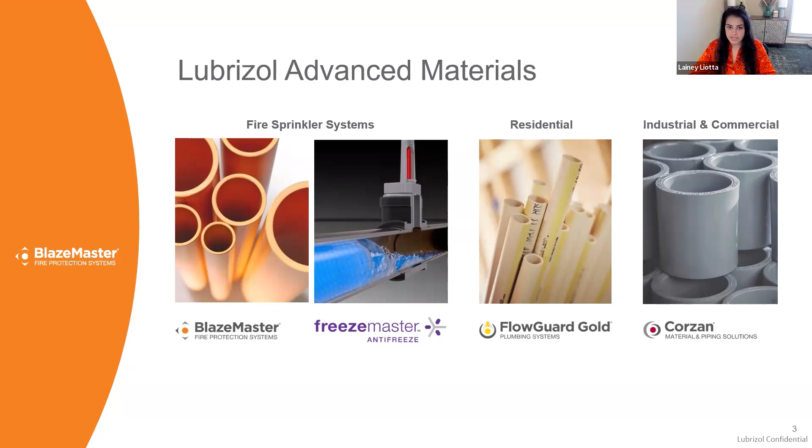But today, due to this being a fire protection webinar, we'll just focus on the BlazeMaster component. So Lubrizol manufactures the powder and the pellets that go into the pipe and fittings. We do not actually manufacture the finished goods. We are the science behind the finished good product, and we partner with world-class manufacturers to manufacture BlazeMaster pipe and fittings. And our two partners for North America that serve the world are IPEX and Viking.

Most of you are probably familiar with Johnson Controls or Tyco. They used to manufacture our product and sold off their CPVC business to IPEX. Fortunately, IPEX was already a customer of ours, both on the BlazeMaster side and on the Corzan side, so we already have a really good working relationship with them. I think it went into effect a year and a half ago, maybe a little less, and that was sort of a seamless transition from our standpoint. And they make just as good of a quality of product as JCI did. And then we've been partnered with Viking for a while too.

And then Georg Fischer, they make pipe only for aspirating smoke detection systems, or ASD systems, or what are commonly called VESDA systems. So when you're dealing with these three, you are dealing with BlazeMaster product. And so now I'm going to turn it over to Michelle and then Emily so that you guys can understand the science. And then I will come back on a little bit later and talk about how it applies to the job site. So Michelle, I will turn it over to you.

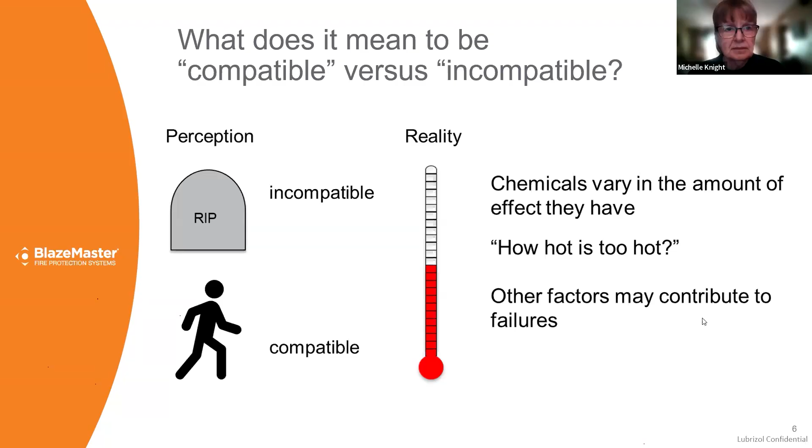Microbes living in the water or on the pipe wall can affect it. They will secrete acids as part of their metabolic process, and the acids will dissolve or corrode the pipe. Galvanic action, everybody's familiar with that. When you connect two dissimilar metals, you can have actual current that will corrode the piping system. And stray electric current, for instance, if someone grounds the electrical system to the piping system, that can cause corrosion of the piping system as well. So that's a summary of what metals might be sensitive to.

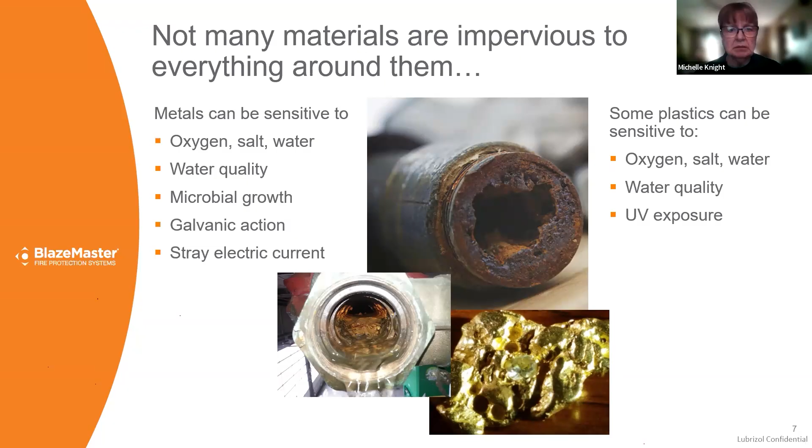It's not the same with plastics. Some plastics are sensitive to oxygen, salt, water quality, and UV exposure, but typically it's more organic chemicals that can be found in a variety of different kinds of products that you might come across on the construction site. CPVC is not sensitive to oxygen, not sensitive to salt, water quality, acids that might be secreted by microbes. It's got excellent resistance to all those kinds of things. But there are some chemicals that you'll find in certain construction products that might affect the plastic.

So what is CPVC? A little more background information here. CPVC stands for chlorinated polyvinyl chloride. So PVC, polyvinyl chloride, everybody is familiar with that. It's used in a million and one applications, both in the construction industry and other industries. There's vinyl siding, vinyl flooring, vinyl wall covering, all of that. Whenever you hear vinyl, that's all PVC.

CPVC is chlorinated polyvinyl chloride. So we start with PVC and we add additional chlorine to it. PVC is already 57% by weight chlorine. We increase that using UV and heat to catalyze the reaction. We add more chlorine to it, and that gives it higher temperature resistance, better flame and smoke resistance. So it makes it more suitable for hot water plumbing pipe and also fire sprinkler piping.

You can't use ordinary PVC for fire sprinkler piping. You need CPVC because it's more fire resistant due to the extra chlorine. And I just want to point out here, again, we're making CPVC using pretty high intensity UV light, and we're not degrading it during that process. So a little bit of UV from the sun is certainly not going to hurt the CPVC molecule.

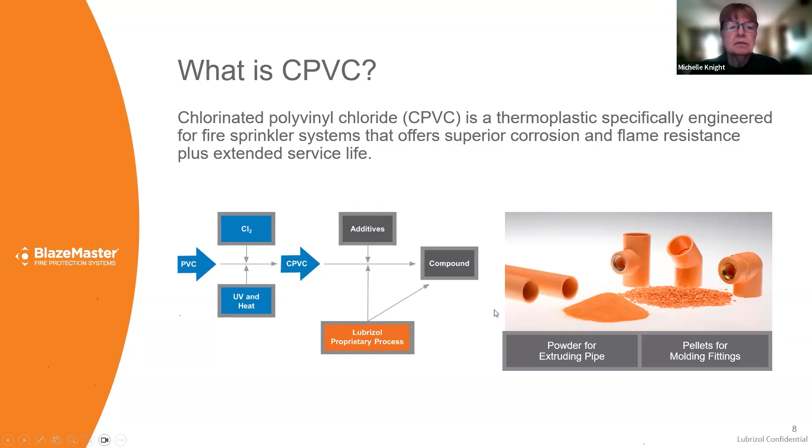The chlorine is a big, huge atom that actually physically protects the backbone from chemicals that might degrade or break down that plastic chain. They're so huge, they're literally like armor plating on the molecule. So this gives it excellent resistance to free radicals created by UV light.

Chlorine, it does not matter what the chlorine content of the water is, or if you need to shock chlorinate your system to kill microbes in it or something, you can't put enough chlorine in a fire sprinkler system to harm it. In fact, it's used in very high chlorine applications in the chlorine production industry in our Corzan products. And plumbing and Corzan are frequently installed outdoors, and they're not being degraded by the UV light there.

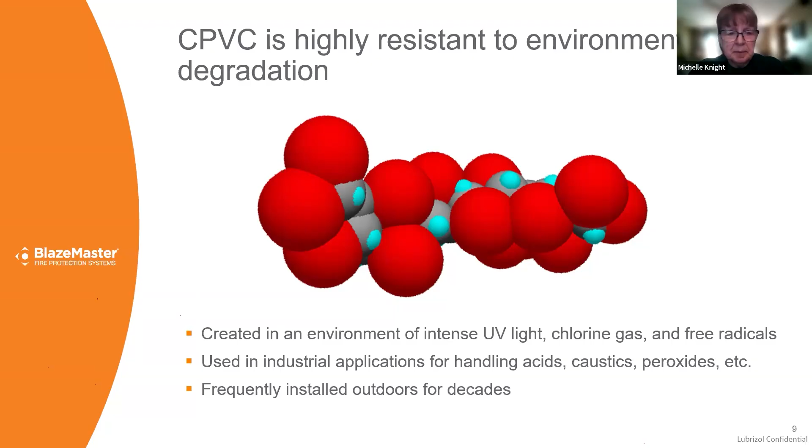So I've mentioned it already, but BlazeMaster is not incompatible with UV light. It does not affect the long-term pressure bearing capability. It does not decrease the service life of the CPVC. It may discolor it a little. The orange pigment doesn't hold up as well as the CPVC does. And it may age a little and become hard to cut.

We do recommend if it's been laying around in the sun, you use a gentler method of cutting than a ratchet cutter. You might want to use a fine-toothed saw or a wheel cutter. But if you can cut it without cracking it and get it installed, it's not going to affect its long-term pressure-bearing capability at all. Or if it needs to be installed exposed somewhere where it's getting a little bit of light through a skylight or a window, that's not going to affect it at all either.

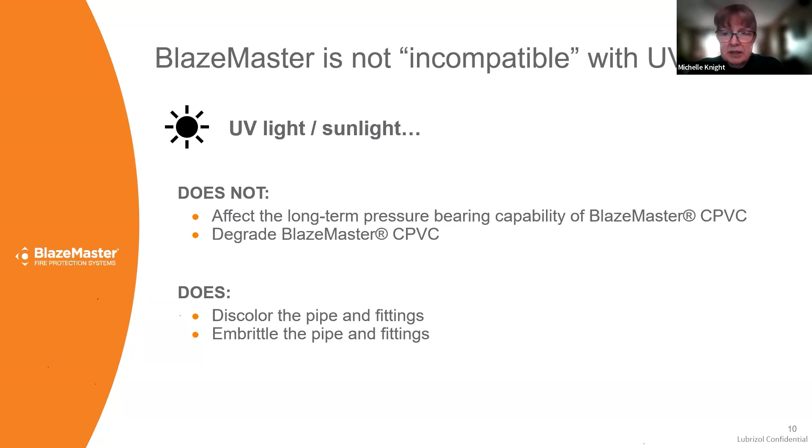So getting on to the subject of compatibility. There are three types of plastics, and CPVC falls into the first group, which is called amorphous plastics. Its strength depends entirely on chain entanglement. Other types of plastics like polyethylene or polypropylene are semi-crystalline. They're held together by those crystallites.

The molecules are all tied together. And this makes a difference in chemical resistance when the molecules are tied together or crystallized. Chemicals have somewhat less of an effect on them, so those types of plastics are a little bit less susceptible to environmental stress cracking than amorphous plastics like CPVC.

With CPVC, it's kind of a benefit that chemicals have an effect on it. It gives you the ability to do solvent cementing. You're probably aware you can't solvent cement polyethylene, polypropylene, fiberglass. Because chemicals can affect CPVC, we can solvent cement it, which makes for a nice, easy installation process. But it does mean that other types of chemicals as well can have an effect on the plastic.

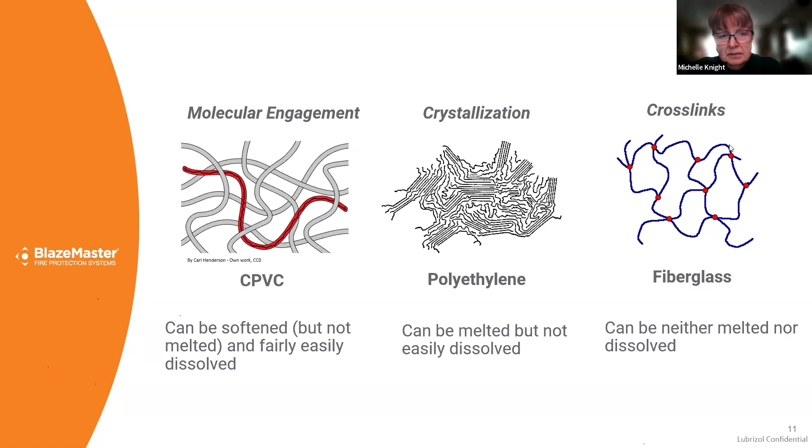So I like to use this analogy when I talk about the factors that affect environmental stress cracking failure, because everybody in this industry is super familiar with the fire triangle. You know that you need three different elements to initiate a fire and to keep it going. You need fuel, you need air, you need heat. It's also very similar with the performance of plastics.

It's not just the fact that the chemical is present that is going to cause the plastic to crack. In a lot of cases, these types of chemicals can be applied to CPVC and they'll last for years and years and years because you don't have the other contributing factors at a sufficient enough quantity. So typically you need some participation from mechanical stress on the system, and we'll talk a little bit about where mechanical stresses can come from in a sprinkler system. And then, of course, the properties of the material and the part are always going to play a role.

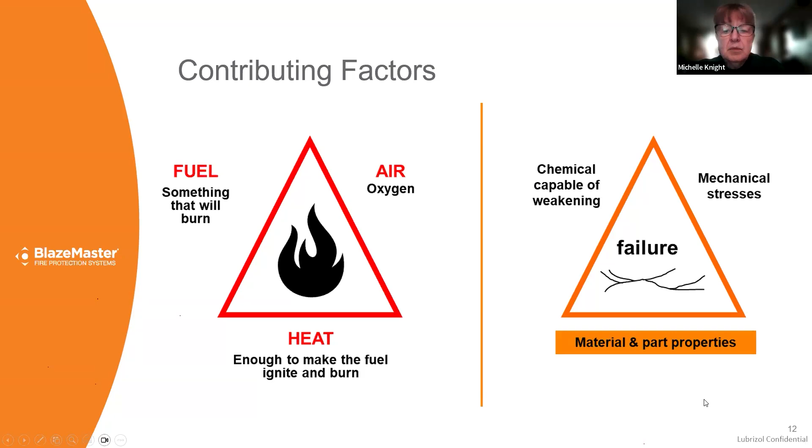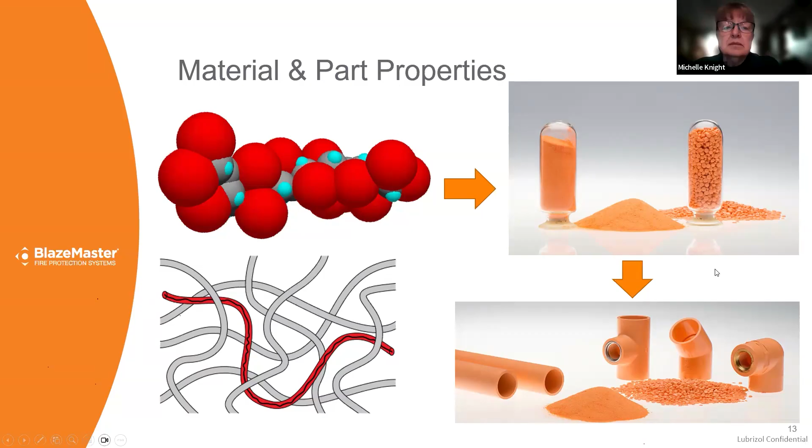So mechanical stresses, of course, the pressure inside the pipe is always a mechanical stress. The pipe's got to hold pressure inside of it. There's also normal installation stresses. It's got to support its own weight and the weight of the water in between the hangers and so forth.

You may or may not have thought about this, but I think you're all aware there's a tapered socket in the fittings, and the bottom of the socket is slightly smaller than the size of the pipe. That makes for a super tight joint. In fact, the joint is the strongest part of the system when it's properly made, but it does put some stress on that fitting socket when you run the pipe home into the bottom of the socket. So there's some stress there. Those are all normal kinds of stresses.

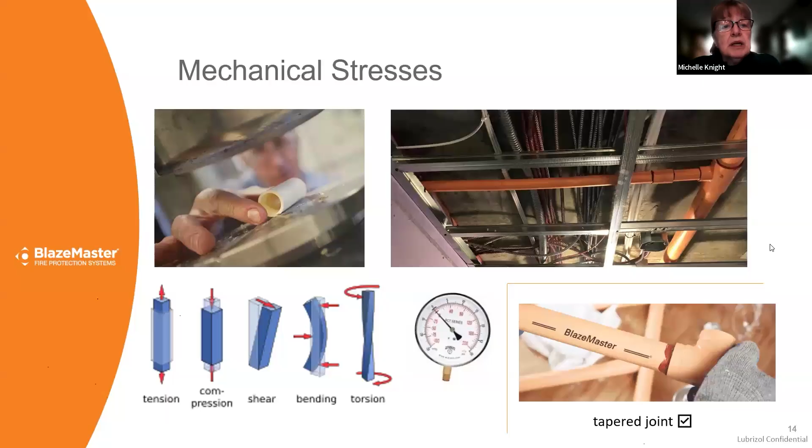So now I'm going to hand it off to my colleague Emily Naim, and she's going to talk to you about the different types of chemicals that can affect the plastic and where you can find those chemicals in construction products. Great, thank you so much, Michelle. So these chemicals are going to generally fall into three main categories. Plasticizers, which are essentially added to rubbery material to make it flexible. And we're going to dive deeper into this on the upcoming slide.

Natural and synthetic lubricating oils. This essentially includes oils and fats from vegetable or animal sources, as well as synthetic lubricants. I did want to make a note, though, that petroleum-based oils have a minor effect on CPVC, whereas these natural and synthetic oils tend to be a lot more aggressive. And surfactants also are found in detergents and soaps. In terms of severity, when looking at all these chemicals, plasticizers are definitely going to be the most severe, whereas surfactants are going to be less severe to the CPVC, but they're still going to cause issues over time.

So like I mentioned before, plasticizers are used to make hard things soft, and you're going to find them in a lot of different places on the job site. So a common source of plasticizers include wire and cable, like for communication cables. They typically have that soft and tacky feel. And that soft and tacky feel essentially is a sign that wiring typically has plasticizers. But again, all wire and cable is not created equal.

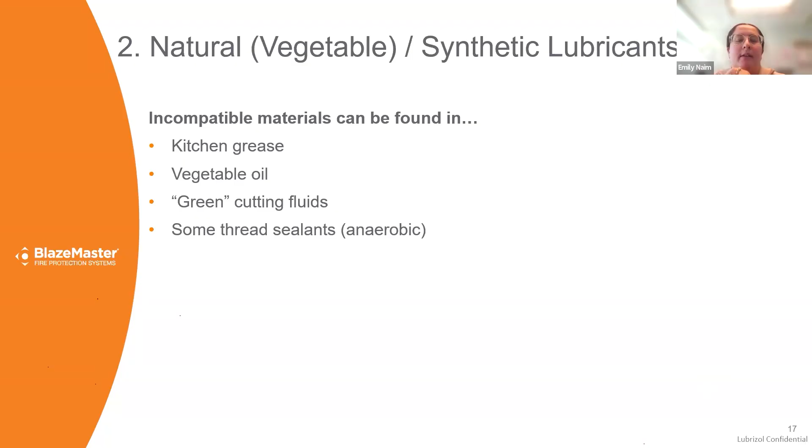And the last chemical that we'll be really talking about in depth is surfactants, which I had mentioned before are synthetic detergents. And you can find surfactants in some leak detectors, like the soap blowing leak detectors. Again, if you're looking for a leak detector that's compatible, please check out our System Compatible program. We have a few listed. Surfactants are also found in different cleaning products and disinfectants and mildew treatments, and of course, compatible versions can be found on our program.

And again, some typically incompatible surfactants include dishwashing detergents with synthetic detergents, termiticides, insecticides, fungicides. Those sorts of products have solvents and have surfactants to help disperse the product for application. And of course, a strong emphasis on fragrances. They are environmental stress cracking agents. Please do not put them in your system.

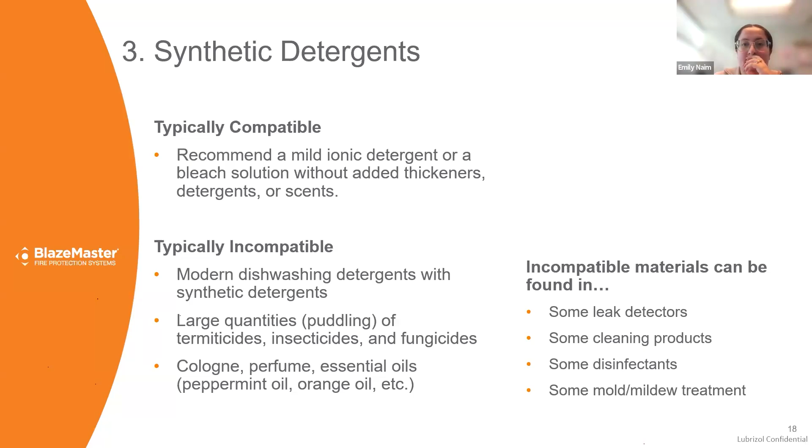So another hot compatibility discussion in the industry is spray polyurethane foam. Is it compatible with CPVC? So like most of us do know, polyurethane foam is a two-part product when it's applied. There's a part A and a part B, but CPVC is not compatible with either part A or B. But when they react, it foams up and its final product is compatible with CPVC. And to understand that, we need to look at the science behind it.

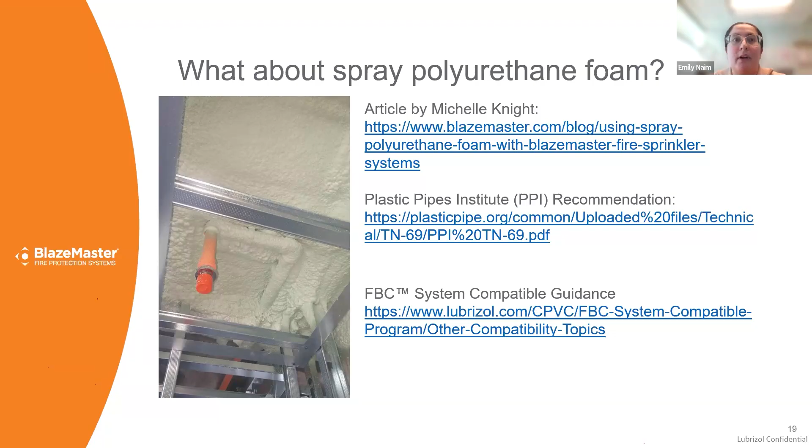If the foam doesn't foam up like we see in the picture, or is partially put on, this will leave the additives on the surface of the CPVC, and this will cause cracking and failure. And just as a side note too, when you're applying polyurethane foam, it can get up to 300 degrees or more in the foam. So just put it on in thin layers so the heat can dissipate, and put expansion loops if you need to.

And now a common question we also get asked about is, is CPVC compatible with paint? And yes, it is. So we recommend any water-based paint or acrylic paint, but most other paints are fine, like spray paint, oil-based, latex. Just apply a thin coat to it, avoid puddling around the joints, but there is an exception to this. The only paint that is not really compatible with CPVC is two-part epoxy, because just like polyurethane foam, CPVC is not compatible with part A or B of the epoxy on its own. So if you have to use it, just keep the coat thin and make sure there's no excess. But at that point, it's honestly easier to stick to a one-part paint.

And of course, before you start painting your pipes, just confirm with your jurisdiction that it's okay to do so, before you cover any marking or print lines. And of course, if you need a letter, please contact us and we'd be more than happy to provide you with one.

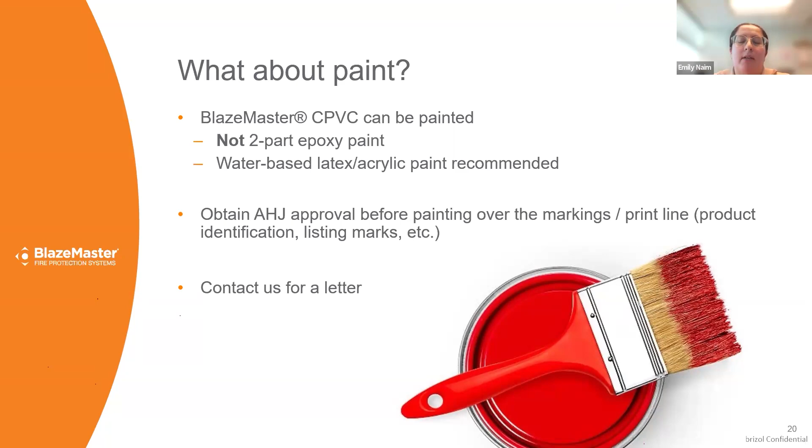So I kind of wanted to end this part of the presentation talking about things you don't need to worry about, because I did give you plenty of things to worry about. So paint, like we discussed, is compatible with CPVC. Most other forms of insulation like fiberglass or blown-in cellulose are compatible with CPVC. Most tapes, besides electrical tape, are compatible with CPVC. If you need to mark up your pipes, Sharpie is not a problem.

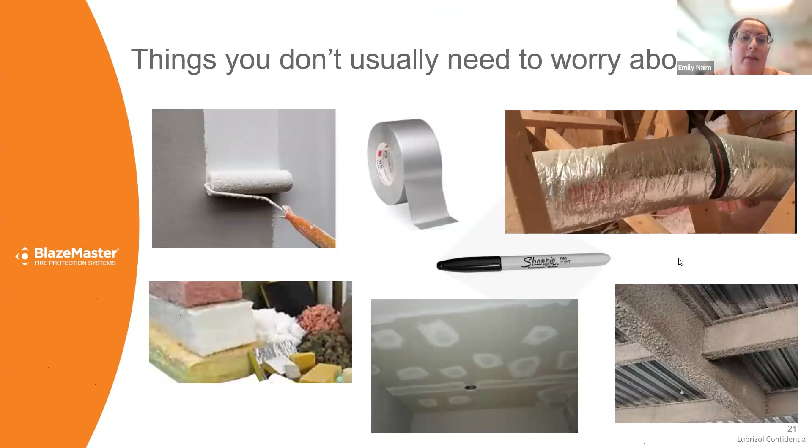Sure. So thank you, Emily, and thank you, Michelle. Great job. And there's a ton of questions in the chat that I'm looking forward to getting to.

But before we get there, I want to talk a little bit about our FBC System Compatible program. So at FBC, our motto is that it takes the guesswork out of chemical compatibility. And I wanted to show you some of the tools that we have that should be used more, I think, and are kind of self-service, so you don't have to wait for us to come back with an answer. What is the FBC System Compatible program? Lubrizol company invented CPVC, and we also invented a compatibility program to go along with it.

So what does FBC stand for? I think that's important to recognize. As we went over before, there's 3 CPVC brands that Lubrizol has: FlowGuard, BlazeMaster, and Corzan. So that's FBC. That's what that stands for. We're the oldest and most comprehensive program in the industry. We have many more products on our list than competitors.

And we developed the testing protocols for assessing chemical compatibility, but we actually contract with a third-party testing resource that does the testing themselves on an annual basis to determine the compatibility of the product. I want to be clear that our program applies only to our brands of CPVC. So in this case, we only assess compatibility with BlazeMaster, not competitive materials.

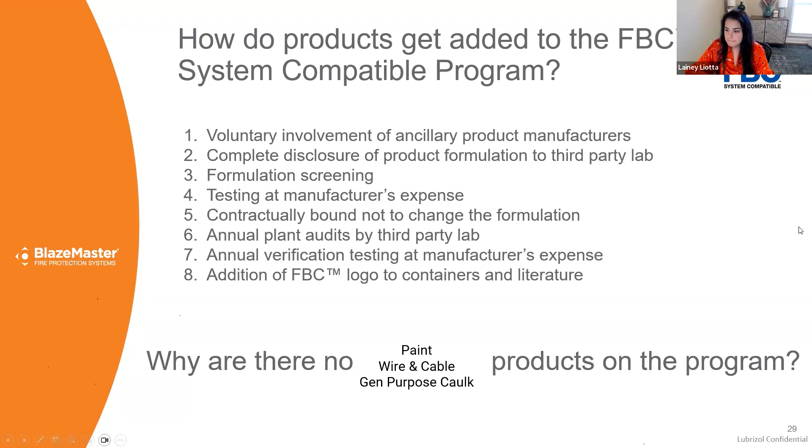So some best practices when it comes to the field is what we just went over. Look for the FBC on the labeling or the packaging. If there's that FBC mark, you're okay. If it's not there, then you can go to our website, go to the app, and follow those 3 steps to verify the compatibility. If you still have questions, you can reach out to us at blazemaster@lubrizol.com, but make sure you're including the SDS or the material data sheet of the product.

I will say that a lot of times there are proprietary ingredients in the product that you're asking us about, so we're not able to confidently look at it and see all of the ingredients. So sometimes we might not be able to give you a straightforward answer, because not all of the things that we need to know are listed on the sheet, but we will certainly try our best.

So when it comes to the actual job site, I mentioned a few of them already, but we very highly recommend including language about compatibility in the specification. That's a CYA, so to speak. Super important that you're educating the general contractor, because a lot of the issues that we see are not caused by the fire protection professionals, right? They're caused by other trades. And so it's super important that other trades are informed.

And we have a few tools to do that, which I'll go into, but one of the ways, and it's also a CYA, to be honest, is printing out the chemical compatibility job site warning and posting it in public areas across the job site so that other trades are aware that there are some things that should not come in contact with the fire sprinkler system.